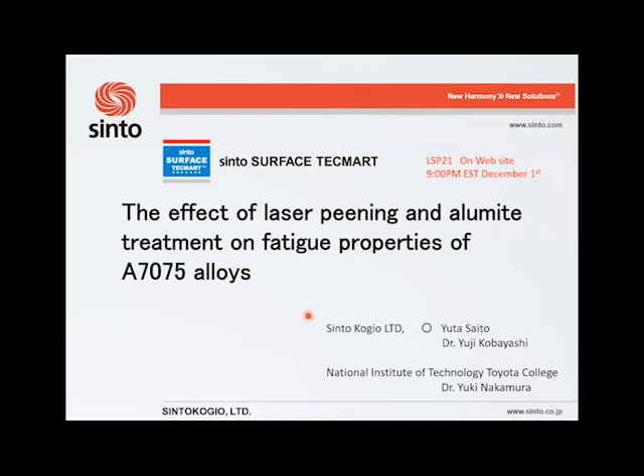Let's start. The subject looks like this. First, let's talk about the introduction.

First, I would like to explain about our company. Our company name is Sinto Kogio Ltd. The head office is located in Nagoya, Japan. The company was founded on October 2, 1934. The number of employees is approximately 4,000, including consolidated.

The company's main businesses are surface treatment, foundry, environments, and etc. The sales ratio is shown here. The company boasts the largest share of the surface treatment market in Japan.

Next, I will explain the history of technological development. We are a company that started with casting equipment, so we developed a shot blasting machine to remove sand from the casting made from the casting equipment. We then proceeded to develop shot peening machines for surface modification treatment and barrel finishing machines. We also started laser peening to accommodate a variety of applications.

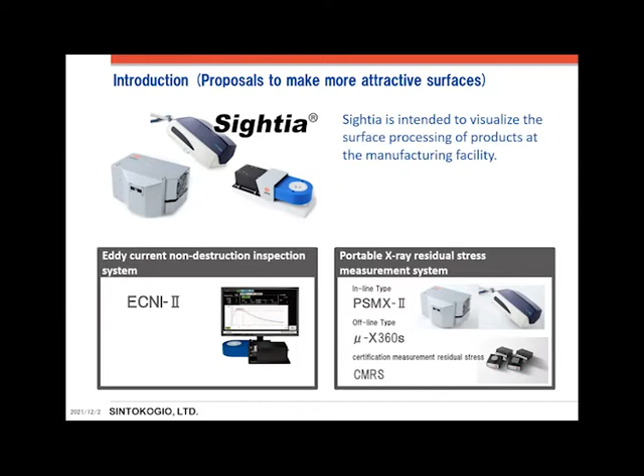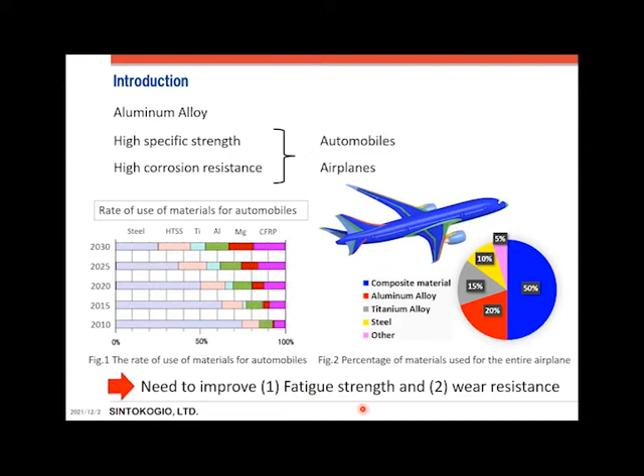Shot peening uses metallic or non-metallic special media, called shot media. The shot media is accelerated by various methods. The accelerated media impacts the processed surface, and plastic deformation is generated at the surface. Residual stress is generated to constrain the plastic deformation layer by the surrounding base metal. Furthermore, the plastic deformation generates work hardening.

On the other hand, laser peening is a technology to peen the surface of the workpiece by irradiating a pulse laser in water, or with water flowing over the workpiece. I'm sure you all know what I'm talking about, so I'll skip the detailed description.

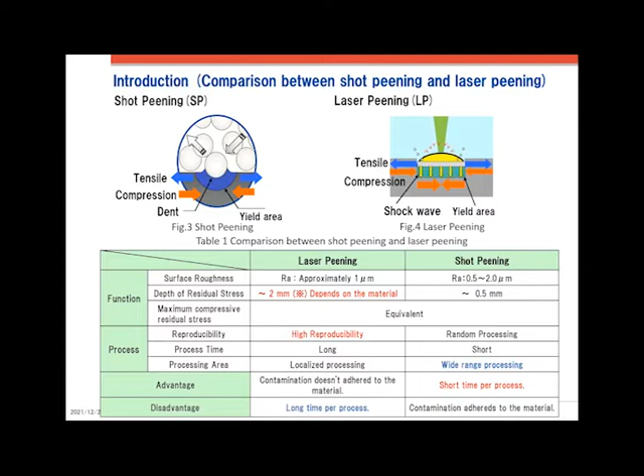Laser peening can introduce deeper compressive residual stress, higher repeatability, and more localized processing compared to shot peening. However, when processing a large area, laser peening takes more time compared to shot peening.

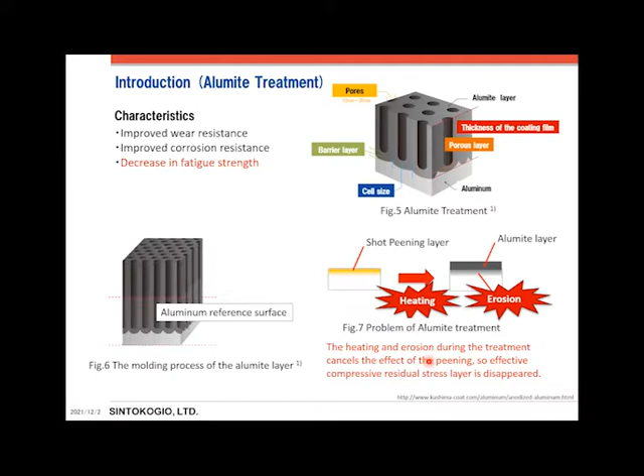In the case of shot peening, the heating and erosion during the treatment cancel the effect of the peening, so the effective compressive residual stress layer disappears. Therefore, we thought that this problem could be solved by laser peening.

It has been reported that the compressive residual stress introduced by laser peening is retained even after heating to 500 degrees. From this, we thought residual stress could be expected to be retained even after alumite treatment when applied to aluminum alloys.

Also, it has been reported that compressive residual stress was introduced to a depth of about 0.6 millimeters in aluminum alloy A7075. During alumite treatment, the effective compressive residual stress layer remains even if the peened layer is eroded.

So we investigated the retention of compressive residual stress and its effect on fatigue properties after laser peening and alumite treatment.

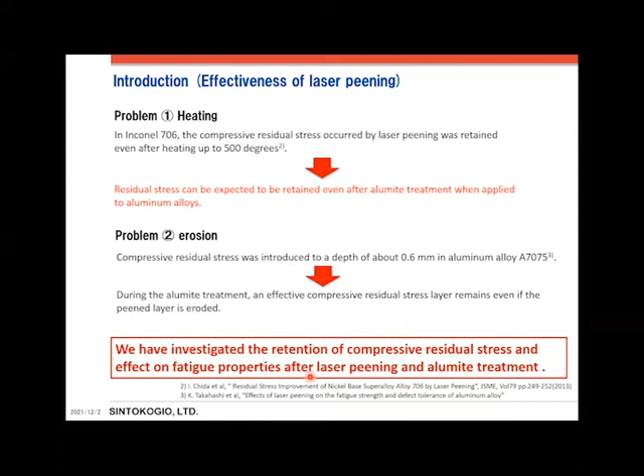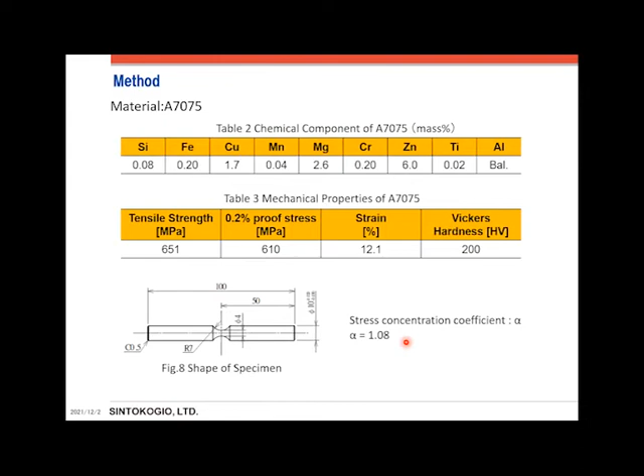Next, I will explain the specifications of the laser transmitter used in this project. The laser type is Nd:YAG laser, emitting visible light at 532 nanometers, the second harmonic. The pulse width is 0.2 nanoseconds, a short nanosecond pulse.

In this experiment, the spot diameter is set to 0.6 millimeters, and the pulse energy was set to 148 millijoules, resulting in a pulse density of 2000 pulses per square millimeter.

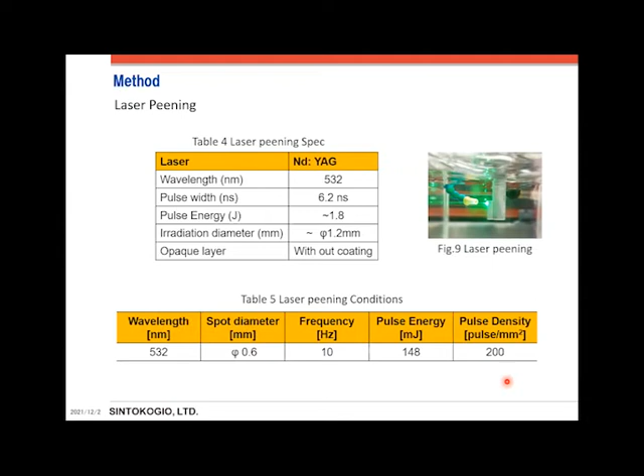This page shows the method of fatigue testing and residual stress measurement. A rotating bending test was used to evaluate fatigue. The cycle speed was set at 3,150 RPM. The test was performed at room temperature.

The fatigue limit was set at 1 gigacycle. The residual stress values were evaluated using an X-ray residual stress measurement system. The conditions are shown in Table 6.

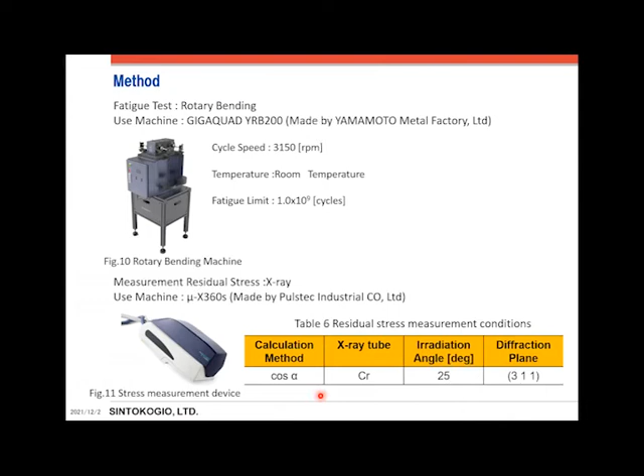This page shows the result of hardness measurement and the residual stress measurement. In both figures, black circle mark is UP, red triangle mark is LP, blue square mark is AT, and orange diamond shape mark is LPAT. The left figure shows the relationship between Vickers hardness and depth from surface.

The surface hardness of LP and LPAT increased compared to UP. The LP condition shows the most improvement in hardness, rising to 238 HV.

The right figure shows the relationship between residual stress and depth from surface. The residual stress measurement was not possible for the alumite layer, so AT and LPAT were measured from deeper than the alumite layer. Compressive residual stress occurred up to about 300 micrometers by the laser peening. Compressive residual stress was not released by the alumite treatment in the LPAT condition.

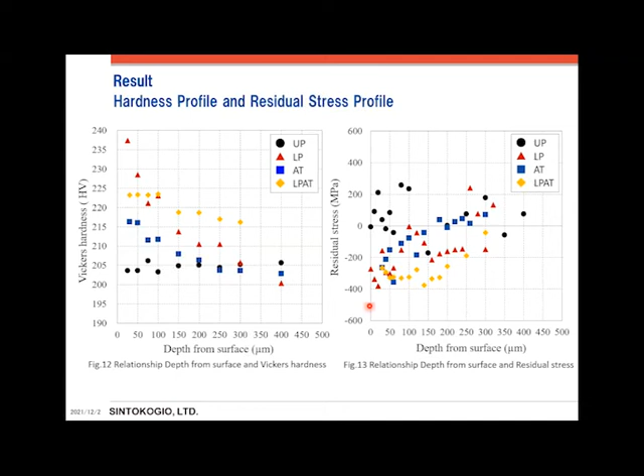This figure shows the relationship between stress amplitude and number of cycles. The fatigue limit values of stress amplitude were the same for UP, LP, and AT. In the area of stress amplitude exceeding 400 megapascal, the fatigue life of LP, AT, and LPAT is lower than that of UP. However, in the area of stress amplitude less than 400 megapascal, the fatigue life of LP and LPAT is increased compared to that of UP.

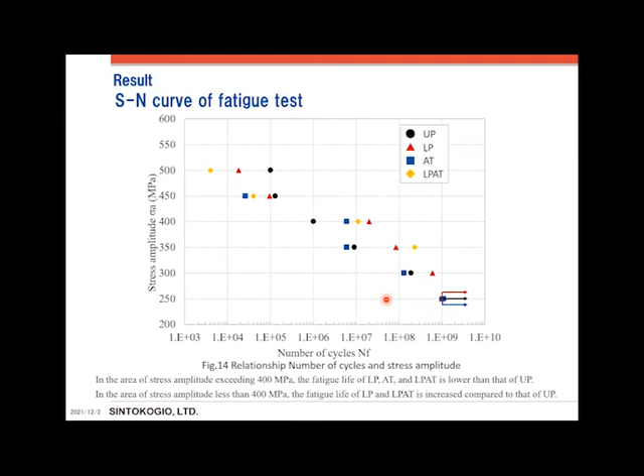This figure shows the fracture surface observation. The upper side shows each condition and the stress amplitude value. Red circles in the figure indicate crack initiation points. In all conditions, the fracture initiation point was from the surface. However, in the LP, AT, and LPAT conditions, several surface crack initiation points were found.

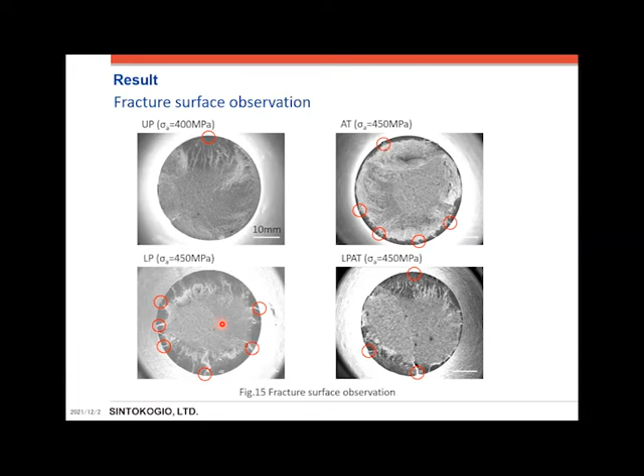So, according to the result of the fatigue test, why is the fatigue life of AT and LP lower than that of UP in the region where the stress amplitude exceeds 400 megapascal?

Yuta, I'm just going to let you know you've got about 3 minutes left. Oh, sorry, I'll hurry up.

As surface roughness increases, notch sensitivity increases. As a result, crack initiation and propagation are accelerated. The surface roughness of UP is low because of the mirror polishing process. The surface roughness increases due to the formation of fine pores in the alumite layer. Laser peening increases the surface roughness compared to UP due to laser ablation of the surface.

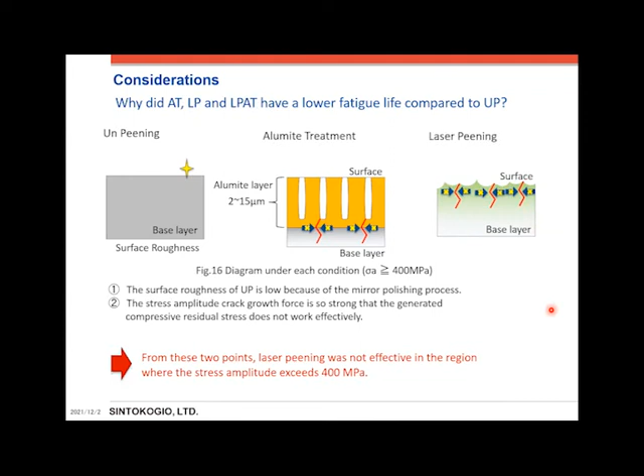So next we discuss why the fatigue life of LP and LPAT increased compared to that of UP in the region where the stress amplitude was lower than 400 megapascal.

This figure shows the model diagram of crack initiation under each condition. UP does not prevent crack propagation because there were no factors to inhibit its progress. On the other hand, LP and LPAT prevent crack propagation because of the compressive residual stress effect.

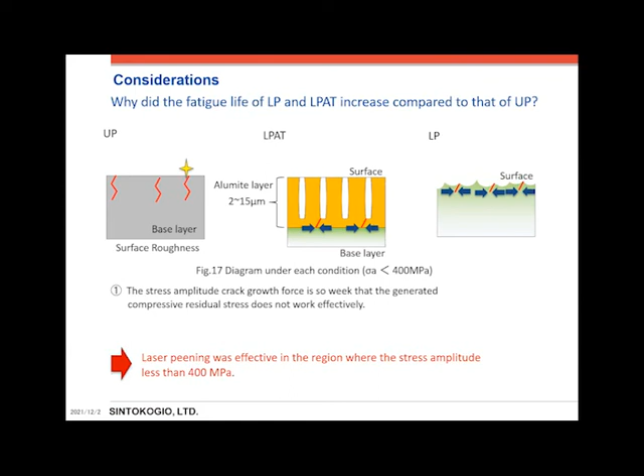So, conclusion. In this study, the effect of laser peening and alumite treatment on the fatigue strength of A7075 were investigated. The result is shown here. Therefore, alumite treatment after laser peening on A7075 did not release the effect of laser peening.

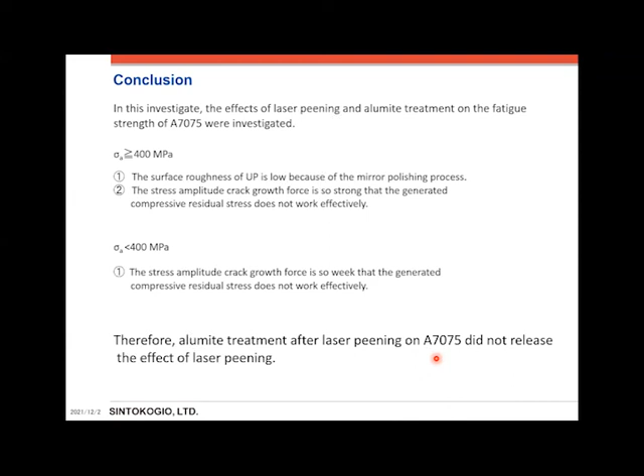Yuta, thank you for your presentation. We greatly appreciate you sharing the information and the progress that you're making. I guess just a quick question, and then we'll have to move on to the next presentation. But at this point, what has Sintokogio done in terms of actually trying to apply it? You've done a lot of research, but is laser peening one of those tools that's going to become an important product line for Sintokogio?

Sorry, could you please ask the question again? What is Sintokogio doing in terms of implementing this as a manufacturing process?